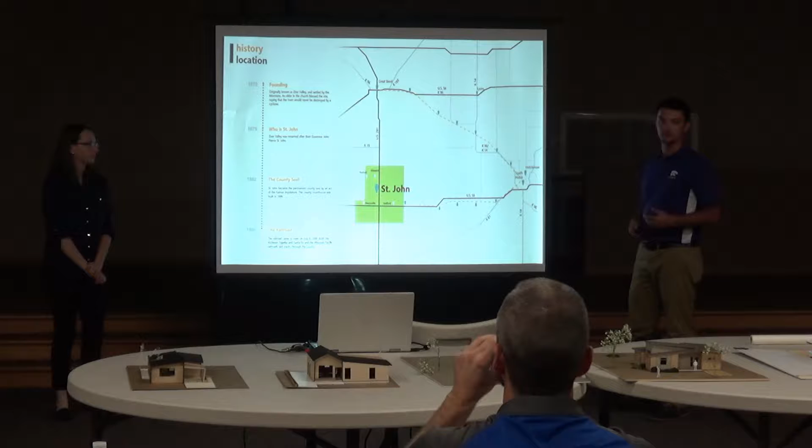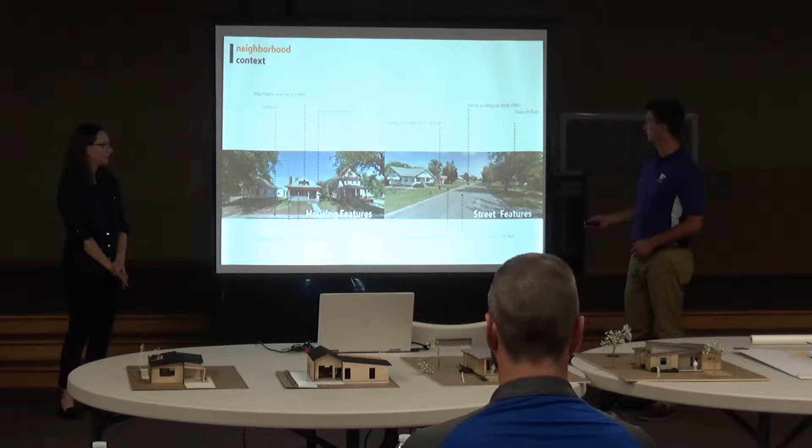This is a little bit about the history. We took some time to dive into the history of the town, understand the fabric of the city. We also drove around town understanding the different structures here, the different housing types, things like front yard setbacks, which are important in the design, the different types of construction and designs, where the sidewalks and driveways are, that kind of thing, so we could understand how to design that into our project.

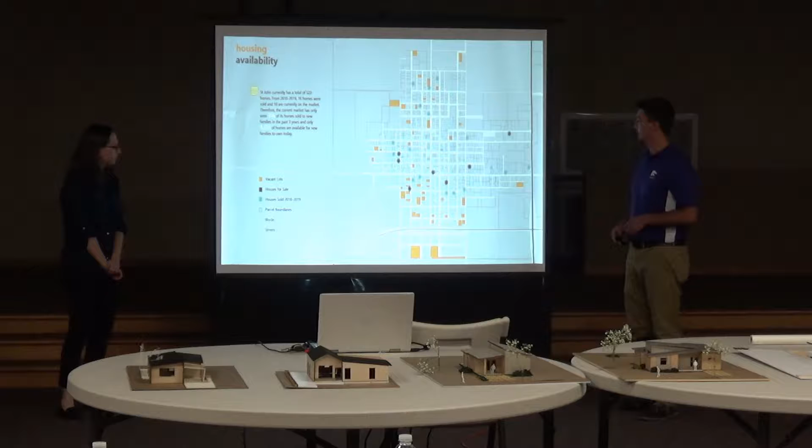We identified that there are 3 major problems in St. John related to the affordable housing problem: scarcity, the cost and energy of the existing housing, and the quality of the existing housing. So we started to map the vacant lots, houses currently for sale, houses that have been sold recently, and began to understand how it lays out on the map of St. John.

We looked at the cost per square foot differences in the houses that were for sale, and we assessed the quality using the information on the GIS system that St. John has, to understand the current condition of the housing that's available. We identified a market we are trying to design for, and started to identify how many of the homes were in a condition that are sellable or rentable, and what is not.

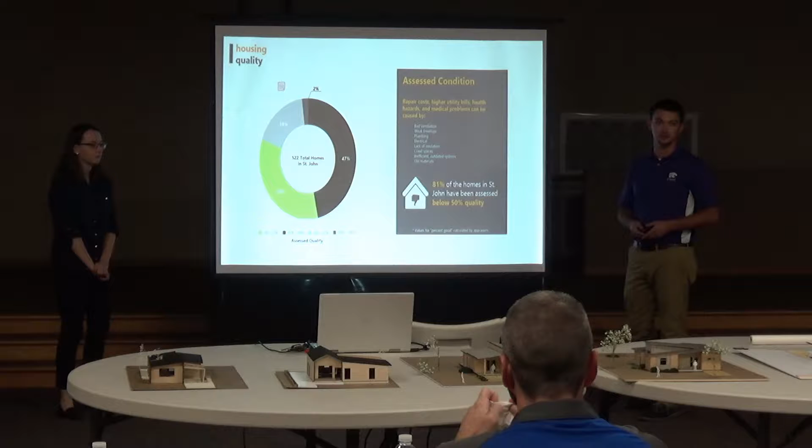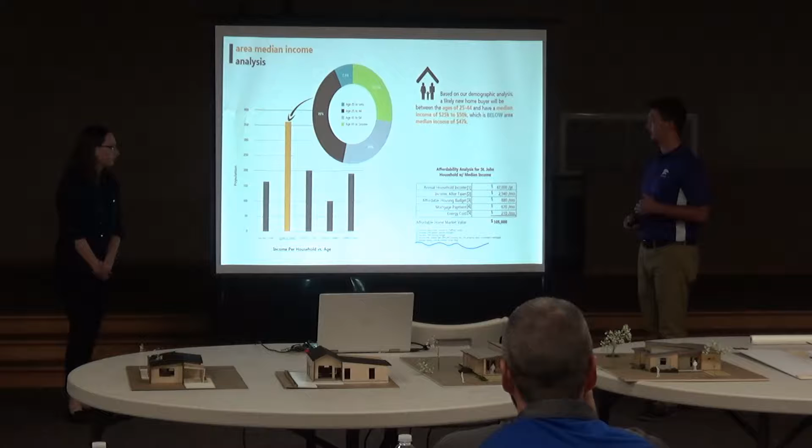We concluded that 81% of the homes in St. John are below 50% of the assessed quality. There are 51 vacant lots. Most of the houses were built between 1901 and 1930. We identified that we're really targeting an age group around 25 to 44 that make a median income of around 25 to 50,000, below the area median income of 47,000.

We took a look at some of the current housing options in St. John for a potential renter or buyer. Obviously the most expensive option would be a new build. We've got existing houses from the 1920s to the 40s, and a lot of existing houses from the 70s to the 80s.

So this is a breakdown of how we figured out how much these options would cost. For a new build, the project cost would be almost $200,000, and with that you'd also have a pretty high energy bill every year. For a 1920s existing home, the cost to buy is fairly low, $50,000, but the cost to renovate could be really high, plus an extremely high energy bill. To purchase a decent quality home would be about $100,000, with an energy bill not much different from a new build.

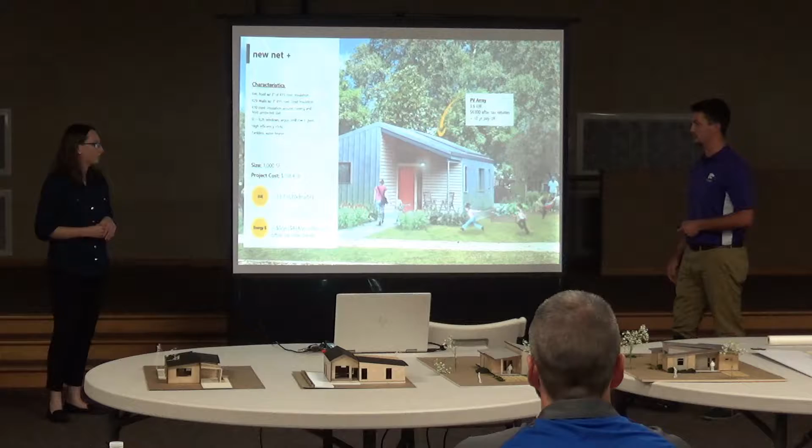So with that, we concluded there is definitely a shortage of new and affordable housing options. That's where we started thinking about how we could create a new net positive design. This was a previous project in Indian Mound, Kansas City that the studio also did, but we're going to skip ahead to our first design and talk about how we are solving this problem.

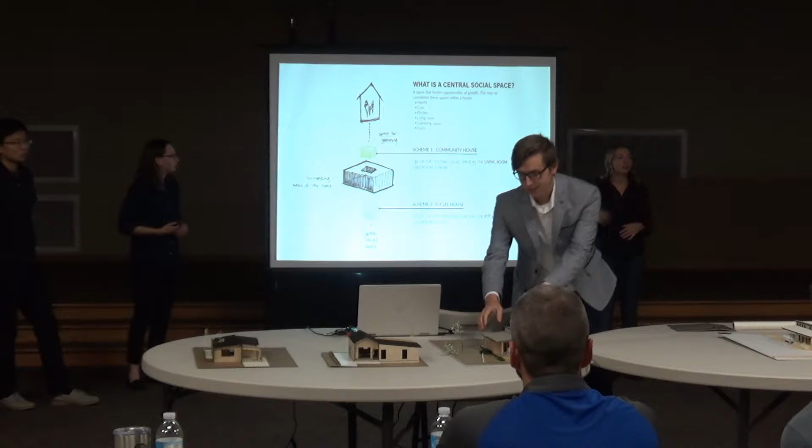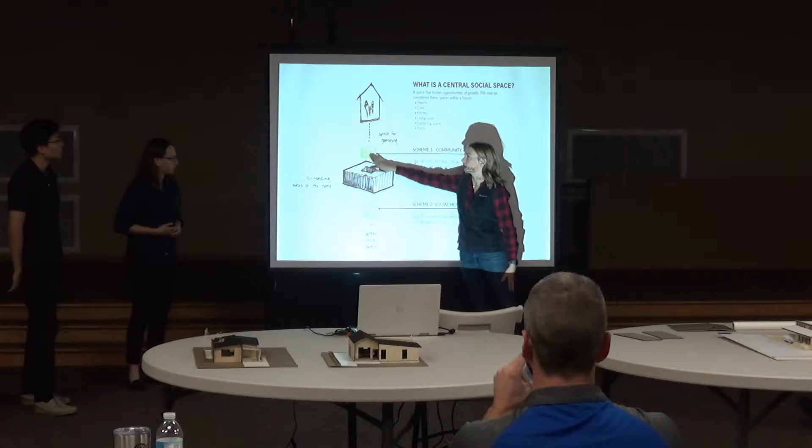So what is a central social space? This can be a living room, the kitchen, the den - it comes in very different forms and shapes. It's basically the center of the house where everyone congregates and gathers around. In these two different schemes, you can see in this diagram the central social space, where everything else in the house is surrounded - this can be bedrooms, a kitchen, it depends on the layout of the house.

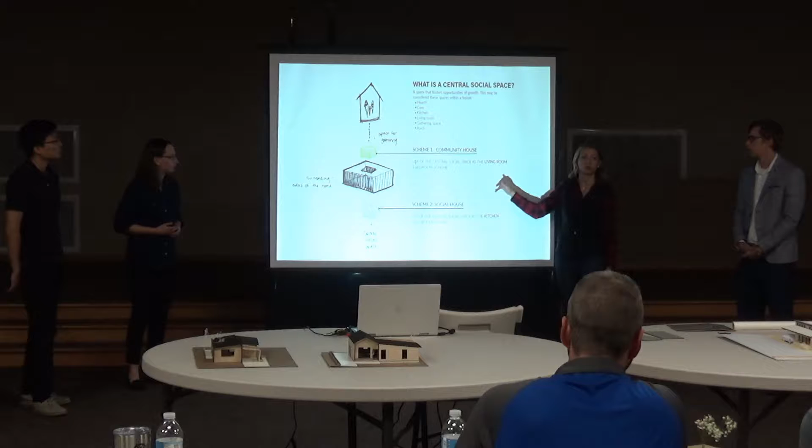Within our first scheme, we made the living room the central social space. Then in the second scheme, we changed it up and designed around the kitchen as a central social space, to see what the differences are in the environment.

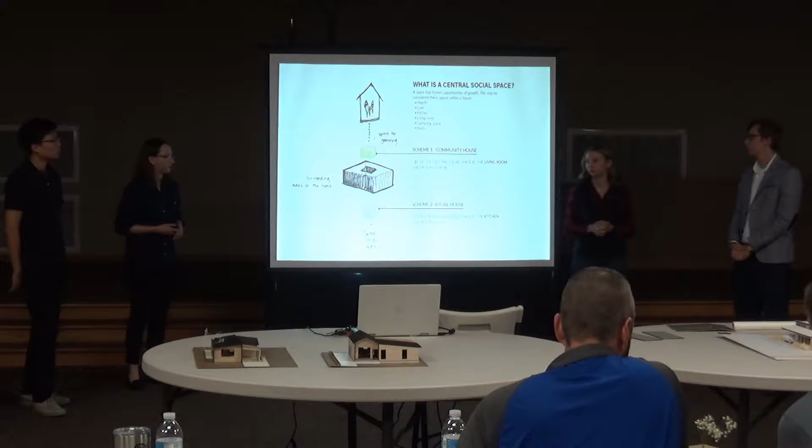Okay, this one is our 3-bedroom design. The area is about 1,000 square feet. The energy cost saving is about $424.

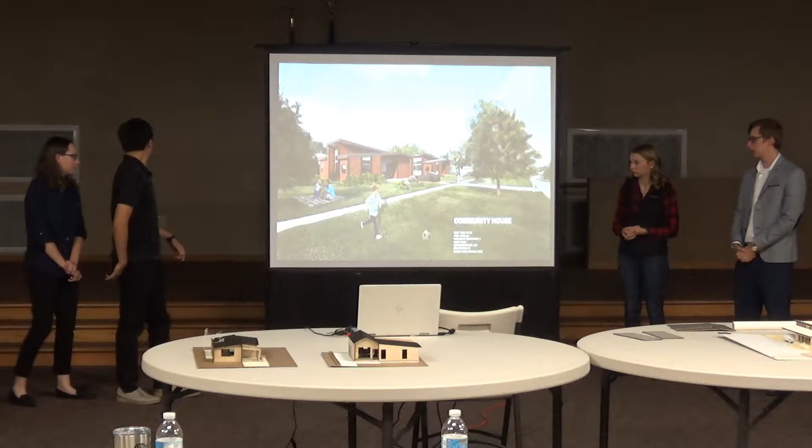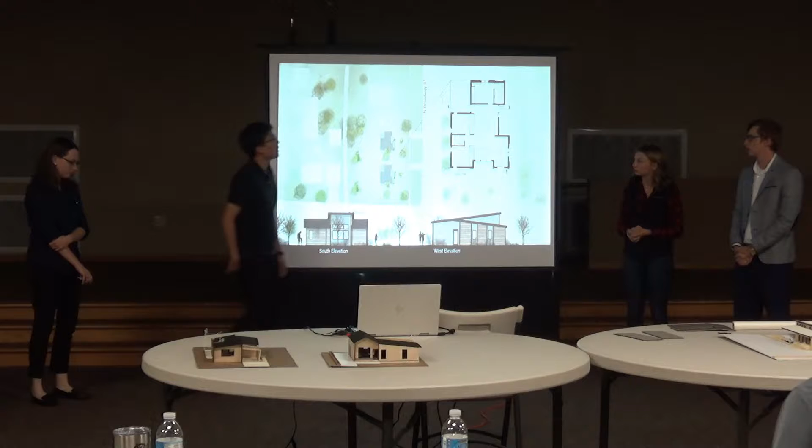This is the floor plan of this design. You can see right in the center is the central living space, and other private spaces such as bedroom, kitchen and bathrooms are arranged around the central living space.

So you can see in the center is a central living space, and these are the elevations of the building.

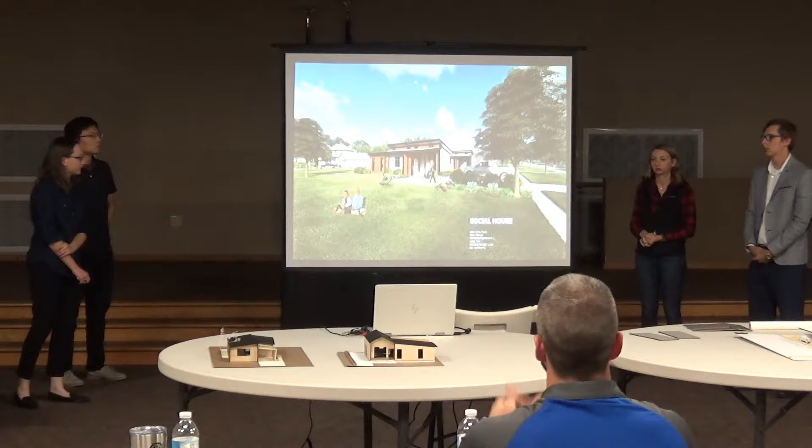This is our second design scheme. It is also centered around the idea of a central social space. The square footage is about 900 square feet.

Our cost estimate for this came out at around $116,000. And the amount of energy this home would produce is about 43 kilowatt hours.

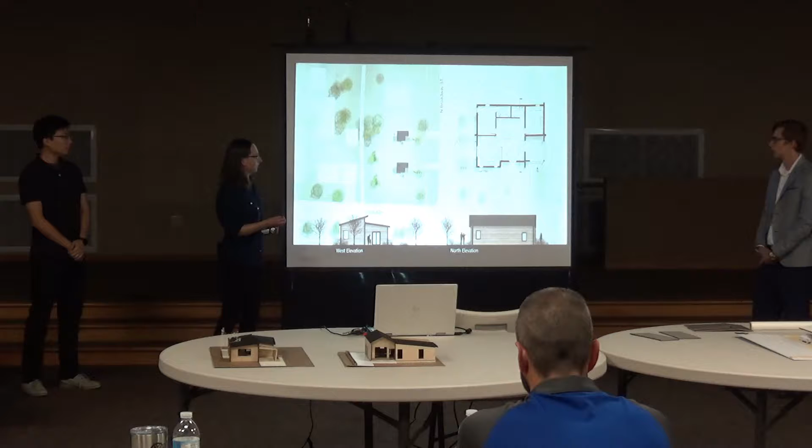As you can see in the floor plan, as we said before, our kitchen is in the very center of this house, with the dining room, the living room, bedrooms, and the bathrooms surrounding it. And then we have our front porch on the east, and the back porch on the west.

So this elevation right here would correspond with this side of the building, and then the north elevation would correspond to the top of this floor plan.

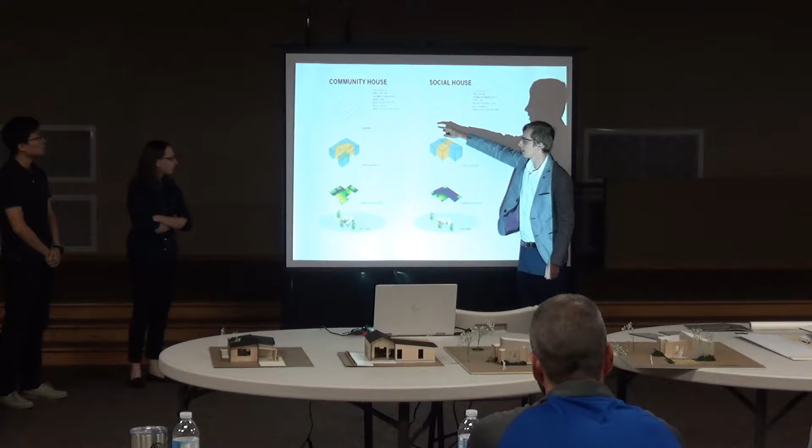These are just some diagrams comparing the two homes. The circulation is pretty similar on both homes, showing the main walking paths in the home, and the axes are pretty much the same on both of the homes.

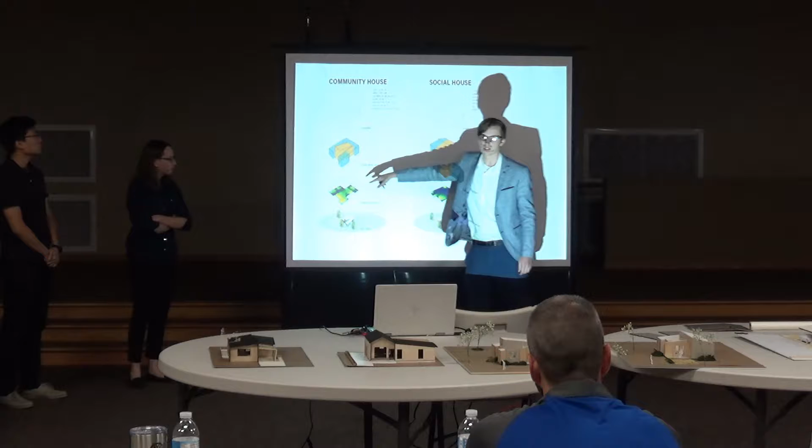And then this is just demonstrating where the main central space is, diagramming it. This is our daylighting factor, showing how much natural light you're going to get in the home and where it's coming from. And this is the site design showing where your main views are and where your sunlight's going to be coming from.

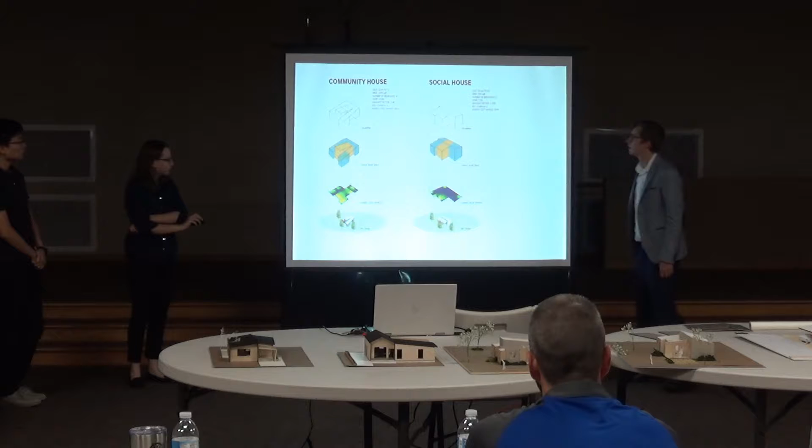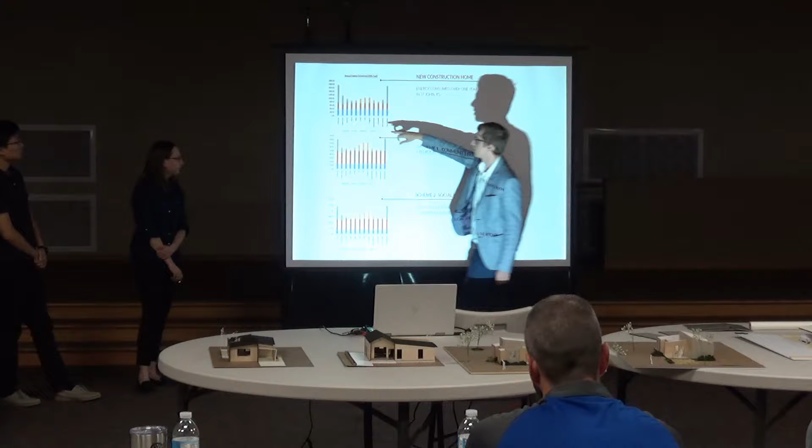These are just our energy savings. One is the new construction, and this is comparing it to ours. The new construction looks very similar, but the numbers on the side are much higher for the new construction than for ours.

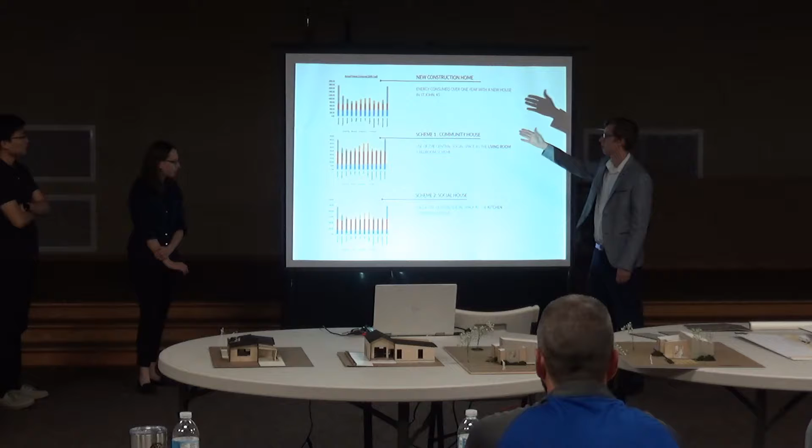And this is just showing how much you're going to save. I think it's like $1,500 per year for the new construction, and it's right at $400 net positive per year for energy costs for ours.

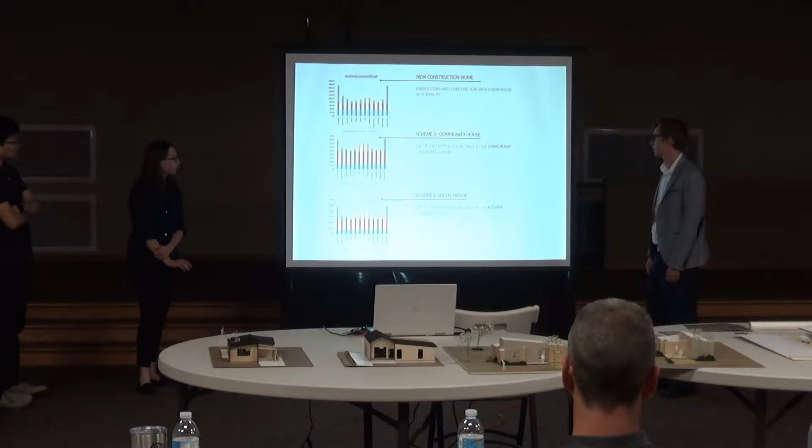And then just to conclude, the main reasoning through all this, with the central social space, why it's important, or at least why we feel it's important in our group, is that today, in terms of modern culture, a lot of families are kind of getting pulled away from each other because of technology, like kids going and playing video games in their rooms and watching TV in their bedrooms instead of eating in the dining room or the living room.

So our thought was that by creating this, we're trying to reconnect families together so that even if their kid is in the bedroom, they can still interact with them and see them and communicate with them much easier by removing the hallway that separates the spaces.

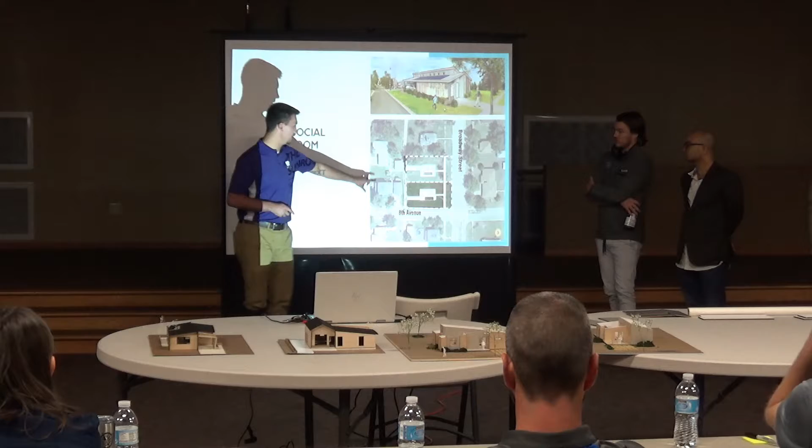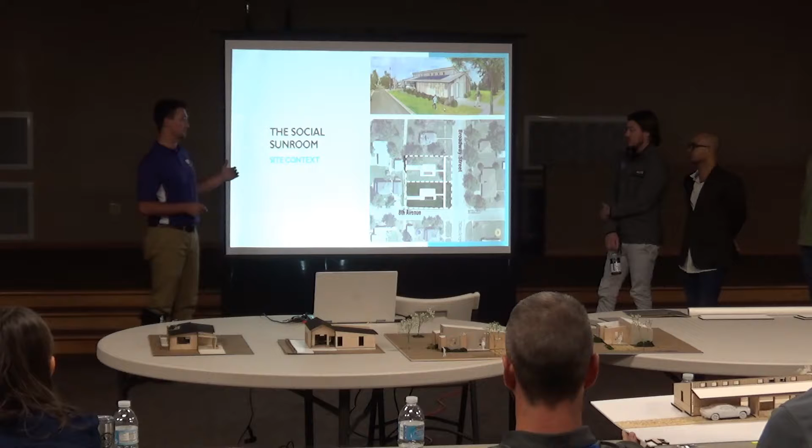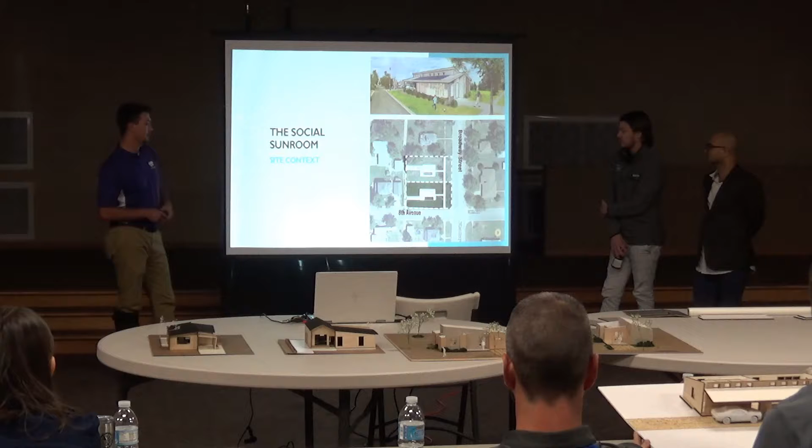Our site is the full 120 by 120 foot parcel. To maximize density, we can re-divide it as it was before it was combined into a single parcel, creating two living units on the site. This shows a potential opportunity for two designs on that street. The corner one is the site plan for the scheme we're showing first, with a front porch on Broadway Street, similar to other streets in St. John, and alley access for parking.

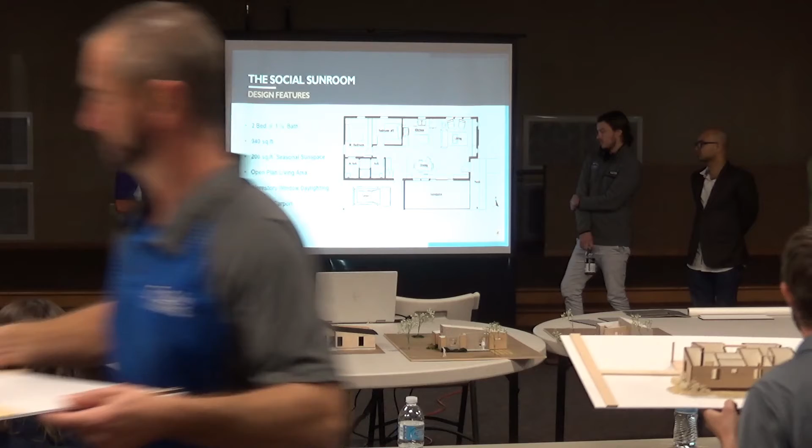The open plan living area has clerestory daylighting, which we'll show in a second. The covered carport is another feature we wanted to include, since we don't have the opportunity for an enclosed garage given the square footage requirement, but a covered carport can still be very helpful.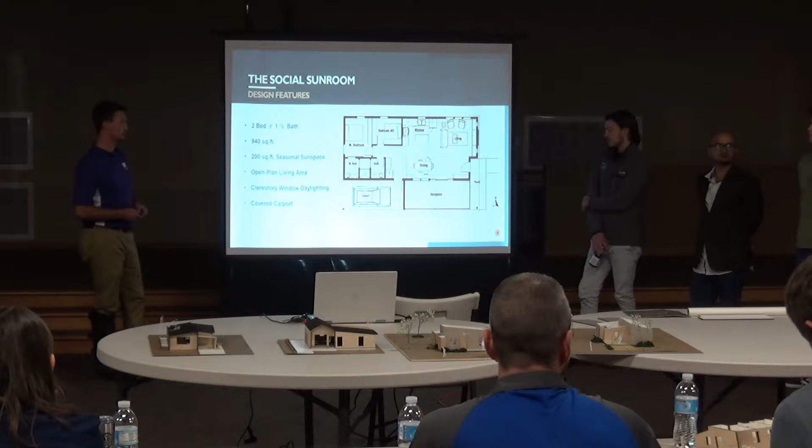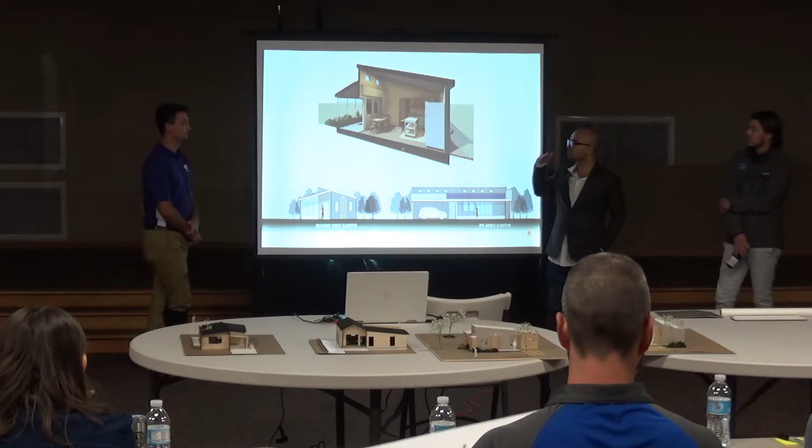This is a perspective section showing the 2-bedroom layout, looking from the living room space towards the kitchen and dining space, with the sunroom in front. This is our elevation from Broadway Street, and this one from 8th Avenue.

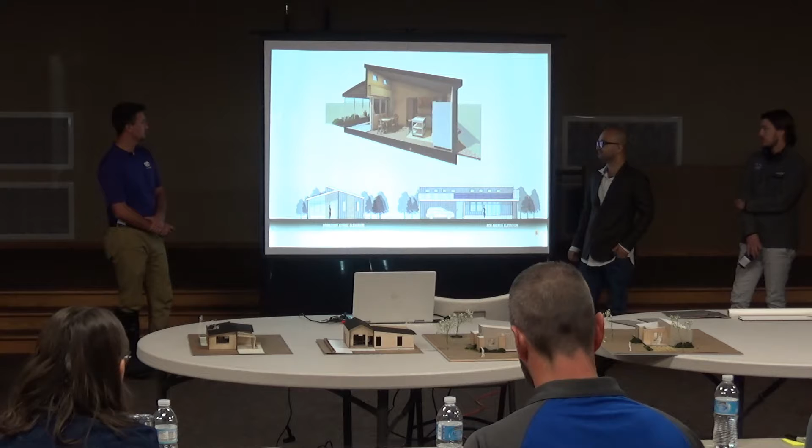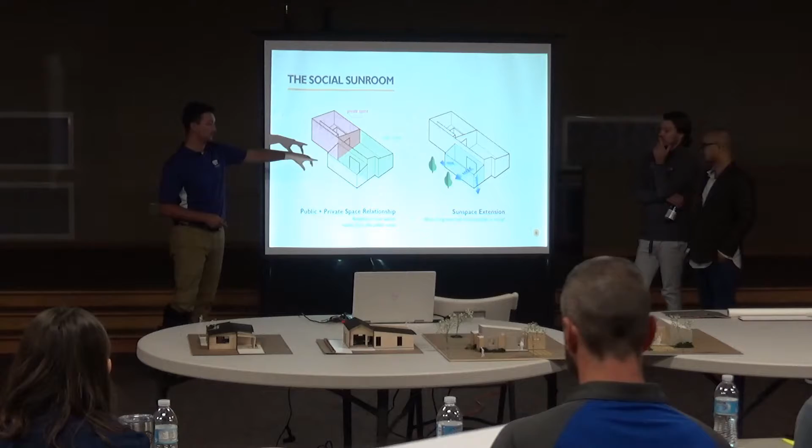For the social sunroom, at a diagrammatic level the public space and private space are separated so the private spaces stay hidden from public view. You can have guests over without them seeing into the bedrooms and bathroom area. It also opens up into the sun space, extending the living room area. In summer you can open up the sun space and it acts as a patio, extending out from the living room and offering nice views to the yard and street.

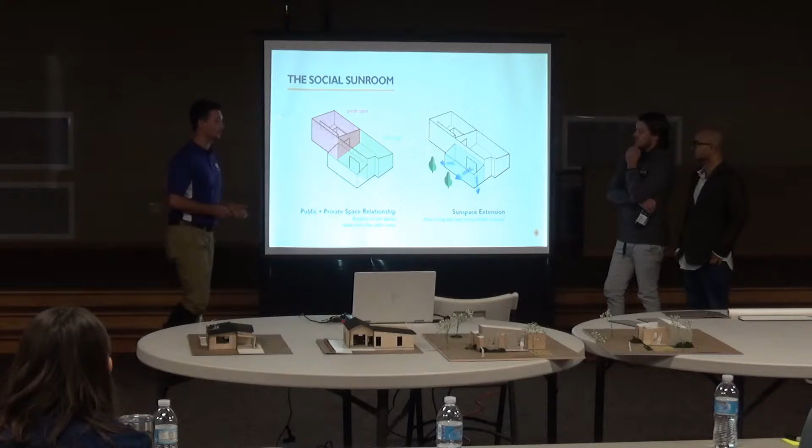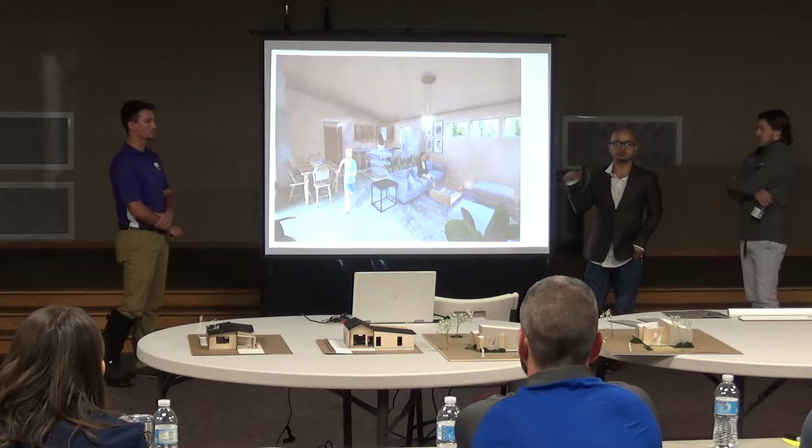This is the living room from the same space, and this is another exit on the side of the house. Here is our sunroom and our living room, and this is the front entrance, with the Broadway street visible from the front. From the front entrance looking towards the kitchen, you see the living space and the kitchen at the end, and this space leads towards our private space, which is visually far from the public space.

This is our building, and this shows how we are using our passive strategies in our building.

This is the passive system we are using during the winter. We are using the sun space to heat our building, and this is our daylight analysis. You can see our space, all the private and public areas, is quite lit throughout the day.

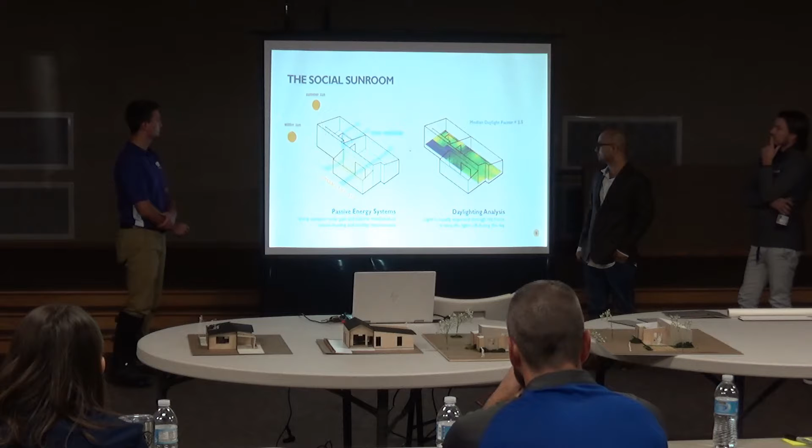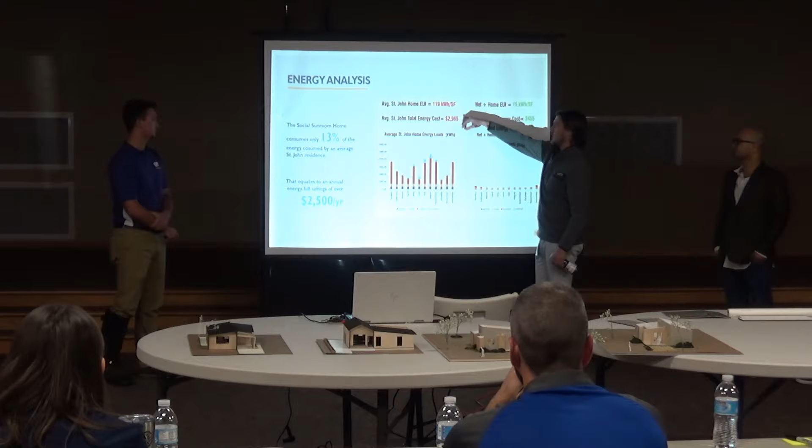If we look at the energy analysis, similar to the group before, you compare an average St. John home to this net positive design. You can see the difference between 119 and ours running 15. Looking at cost, the average cost for a St. John home is about $3,000, and our current scheme is running about $455.

So in summary, the project cost would be around $121,000 for this home, which is about $105 per square foot.

And with that, we'll transition into the second scheme, which we're calling the Living Lookout. We call it that because it offers a 3-bedroom design, so it's a little more comfortable for a larger family, with 2 bathrooms as well.

The Living Lookout offers a lot of lighting in the public area that allows you to look out into your yard and landscape, with some very tall glazing.

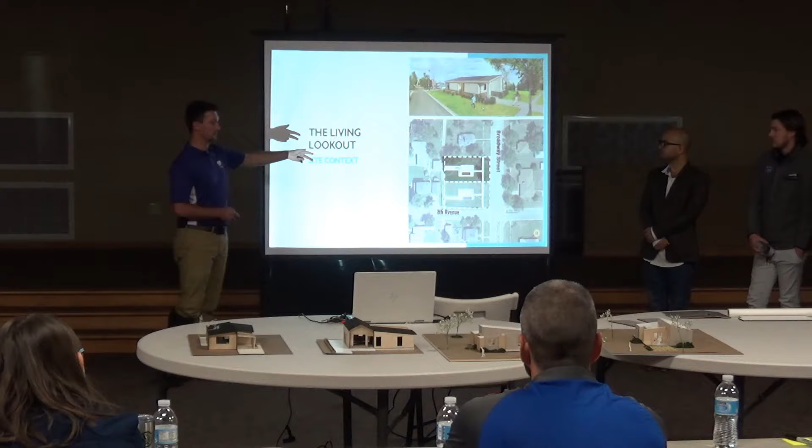So this is again how it's situated on site. This is the other alternative for where it could be situated on the other parcel. Again, it's 3-bed, 2-bath, a little larger at 1,095 square feet.

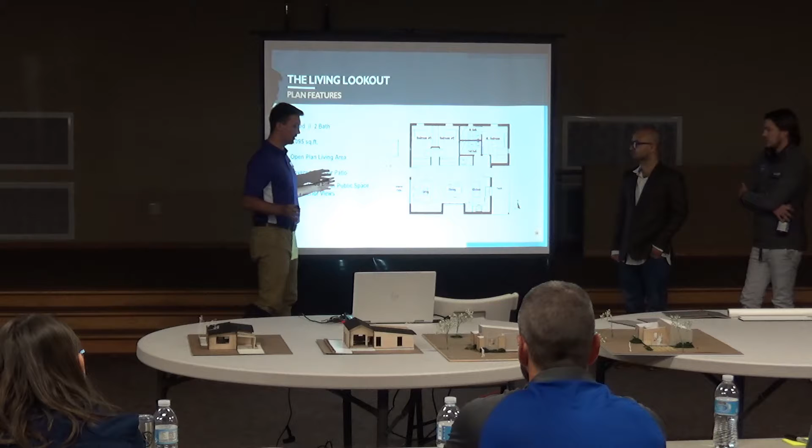Another plan for open area for the living spaces. As you can see on the bottom, you would enter from the right side on Broadway, and you'd open up into a very unobstructed area with the kitchen, dining room, and living room all in the same part of the house.

On the north side of the house, you have 3 bedrooms, including a master with an ensuite, both full bathrooms with the option to have one with a tub shower. It's got a covered exterior patio, which we're using as an extension of the living space that you can enjoy on a nice summer afternoon.

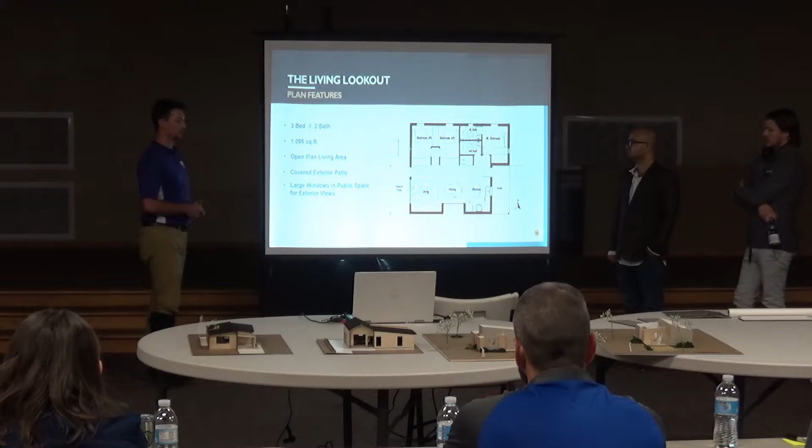And again, those large windows in the public space, which we'll show you. So this is another section perspective looking from the kitchen towards the west direction.

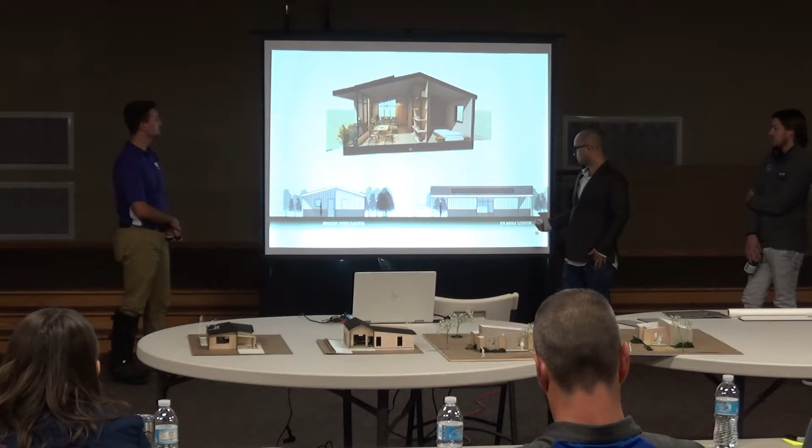At the far end you can see the living room that extends towards the backyard, and there's the dining room, and we have a bedroom, with a transition space of built-in cupboard furniture separating them. This is our elevation, from 9th Avenue, and this is from Broadway street.

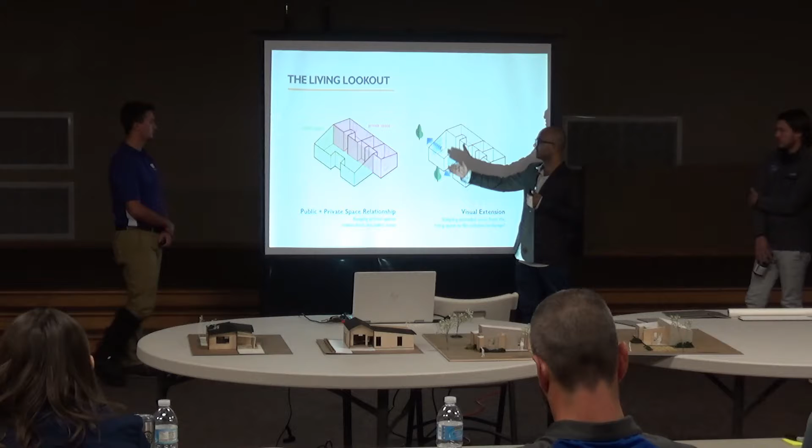The strategy in this 3-bedroom design is that we are separating public and private space through the horizontal axis. In the previous design, we had the same idea but with a vertical axis. So you see the public space towards the south and the private space towards the north.

In this one, we are punching out certain spaces in our elevation so that we could have the interior and exterior space blend, giving a visual extension towards our street.

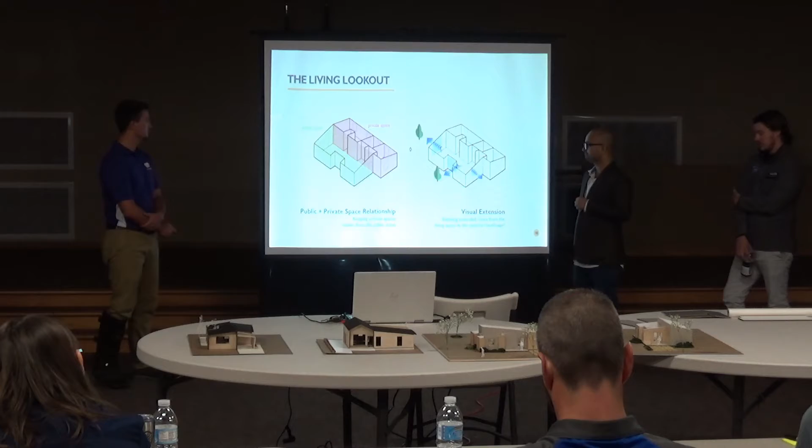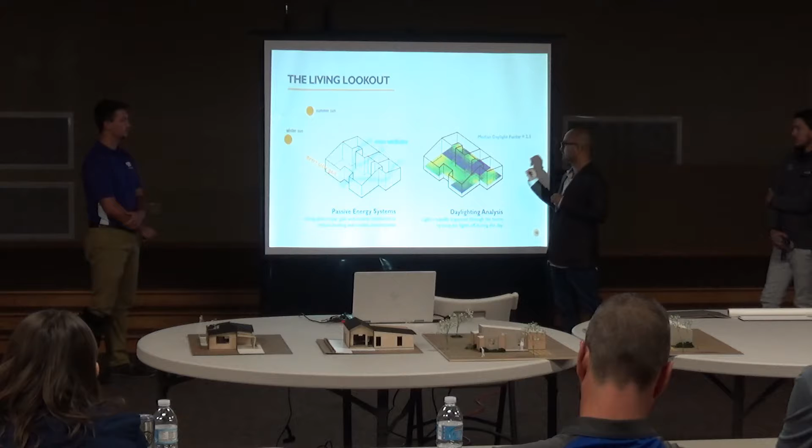For the passive strategy for this building, the first thing we are using is cross ventilation, which you can see in this diagram. That's one of the main ideas, and another is direct solar gain. In the previous design we had a sunroom; for this one we are using direct solar gain. This is a daylight analysis showing we have clear daylight in all of our living space.

So to clarify on the energy thing, when these guys are estimating like $500 a year in energy costs, they're talking about an all-electric house — that's heating, cooling, lighting, hot water heating, and plugs and stuff like that.

The concept of this as a net zero building is that when you bring down the energy use of the house to an amount that low, you can more affordably offset that with solar panels. So one thing we really want to have happen with this house is that the solar panels are part of the house from the beginning, instead of something added on later — built into the house like a built-in appliance, so whoever lives here can benefit from the energy savings from day one.

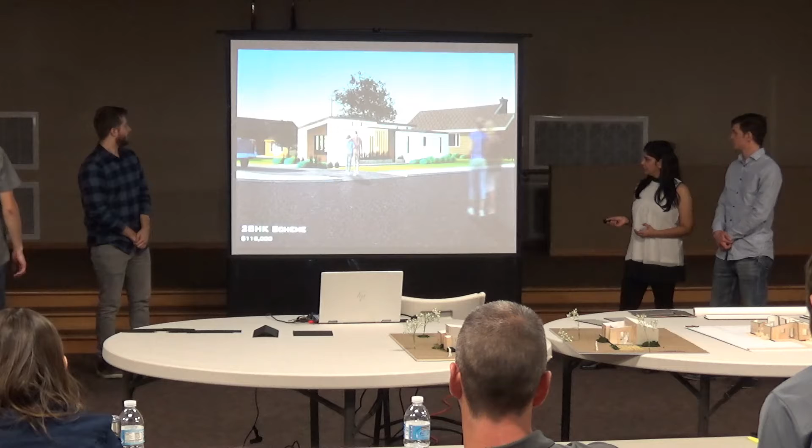So first off is the 2-bedroom scheme. It's going to have a total cost of about $118,000, and it's 984 square feet. It will have 436 square feet of patio space, as well as a paved front yard of about 480 square feet.

So you'll have the intersection of Broadway and 8th, where this house will be located.

So, a simple diagram of how we came to this concept. We took the simple idea of a gabled structure like most of the houses here, and decided on priority of space, changing that gabled structure to reflect private versus public space. We then created voids that allowed those patio spaces to really jump out in this design — you see these three lighter blue squares representing the different outdoor public spaces created through this house.

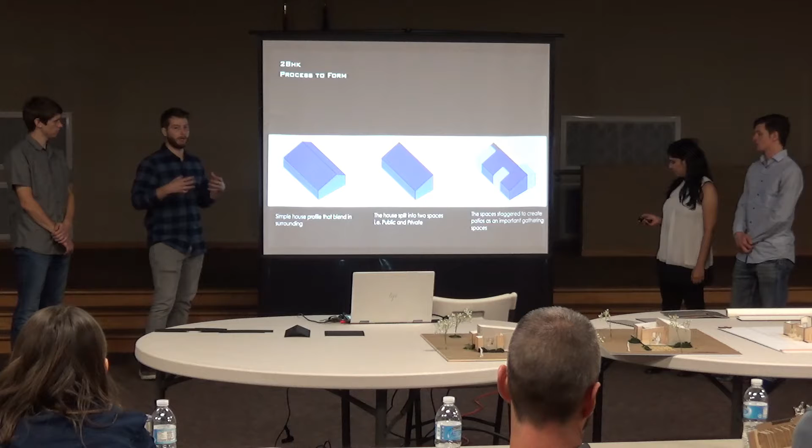So you can see more of what we're talking about. When we were talking to St. John, the three things we heard the most when it came to what spaces you really use for family and friends were: garage, living room, and backyard.

We really wanted that to be a very clear circulation when you're moving into your house — from the carport all the way down into your living room, and then a separate space created through the kitchen, allowing it to have its own identity.

You're allowed to have a living room where maybe people are watching the football game while others are cooking. They can sit down, just talk, and have a more quiet space. And then you have the very clearly outdoor space of the patio — it's all divided through this.

You also have this connection through a second patio space. It brings in plenty of light, so you get a good amount of lighting without it being directly in your eyes when sitting down. We're also suggesting some small planting, which will allow shading during the summertime, and during the winter, when the leaves fall, you'll have plenty of direct light coming in, warming the space when you need it most.

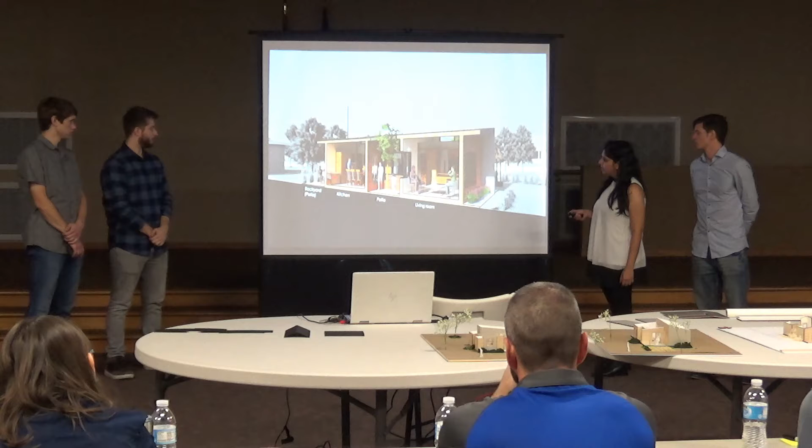In this section, you can see the connection of the public spaces — the living room, the central patio, kitchen, and the backyard patio. Through the openings, even though in plan it looks like a division, all of these are visually connected to each other.

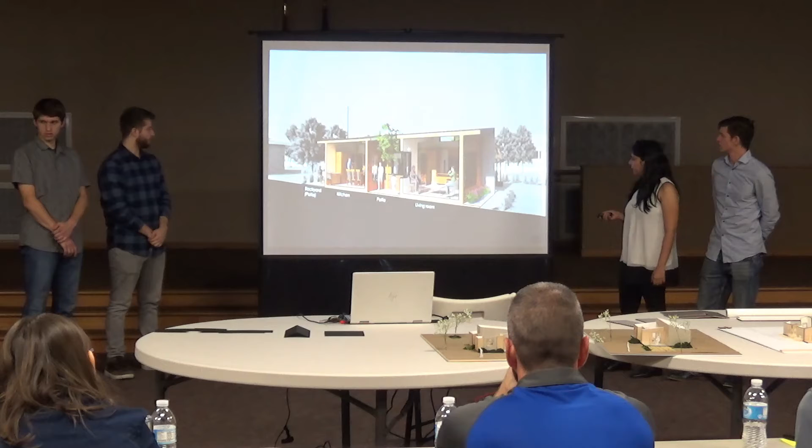This is a view from the living room, looking into the entrance vestibule, the patio, and the kitchen and dining area at the back.

So the passive strategies that we used for this scheme were cross ventilation and solar heat gain, wherein you store the heat into the floor mass during the winter times.

These graphs show the energy modeling where a typical 1980s house would use 48.3 kBtu per square foot, which would cost about $1,500 approximately, but the proposed net positive scheme would just cost $411 annually.

And a good thing to mention now, thanks Professor Gibson, we were able to start talking to a salesman in Hutchinson about solar paneling, a solar installer.

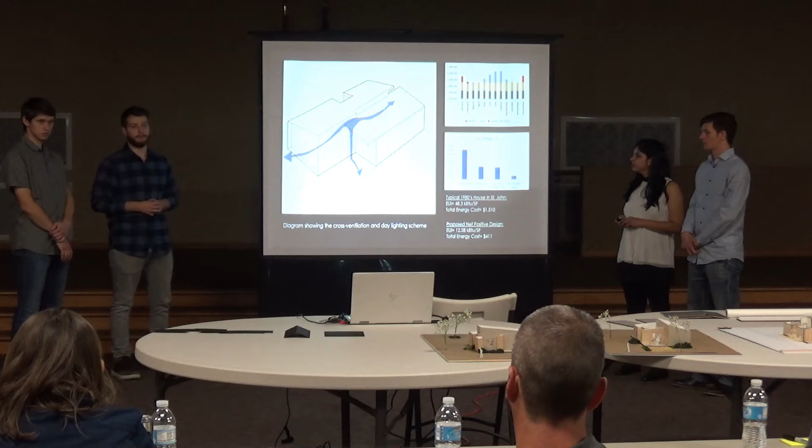These are our schemes for the daylight modeling, where you can see all the spaces are naturally lit.

And this is the structure, the preliminary structural grid, where our main structural walls would run east-west.

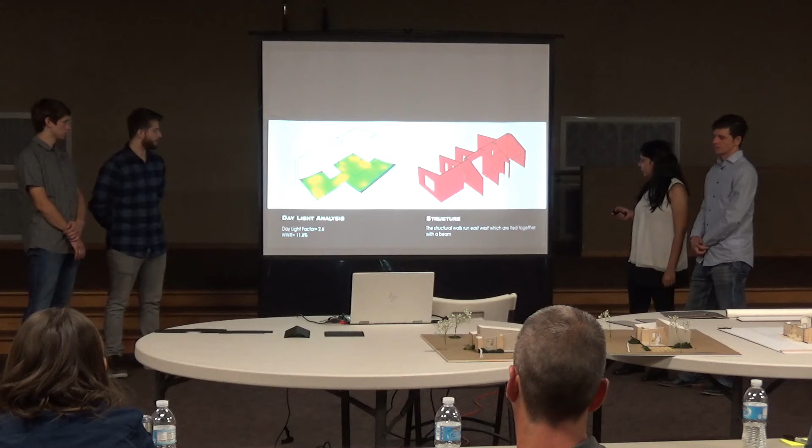This is the 3-bedroom scheme. It has some similarity with the first scheme that you've seen. For us, it was important to have the gathering space in the exterior, and try to make it a gathering space that's also a bit more private, instead of just putting it in the front, take it in the back. And this cost estimate for this one is...

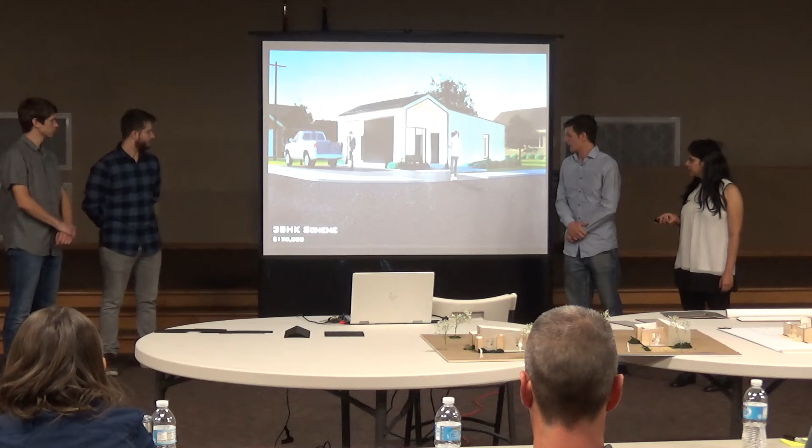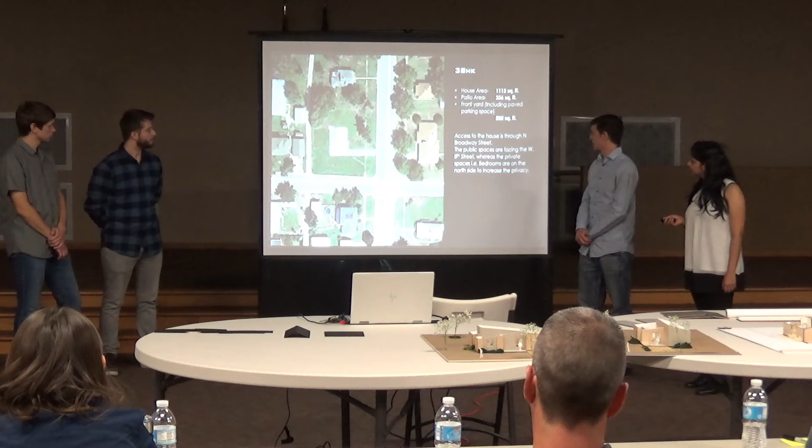$130,000. And this house is a little bigger than the other one. It's 1,113 square feet, and the patio area is smaller than the other one, it's 336 square feet, in the front yard. And you enter through Broadway as well with the car.

So in these schemes, we thought it was important to divide the spaces we're going to be inside, like different groups of area, the private space for the 3 bedrooms and the bathrooms, and then we prioritized the public space. That's one of the biggest, and to save some money and be more efficient, we also tried to connect all the wet areas with kitchen and bathroom to keep it in the same place as close as possible. And then with this L shape, you create this space in the back that's more covered from the street traffic.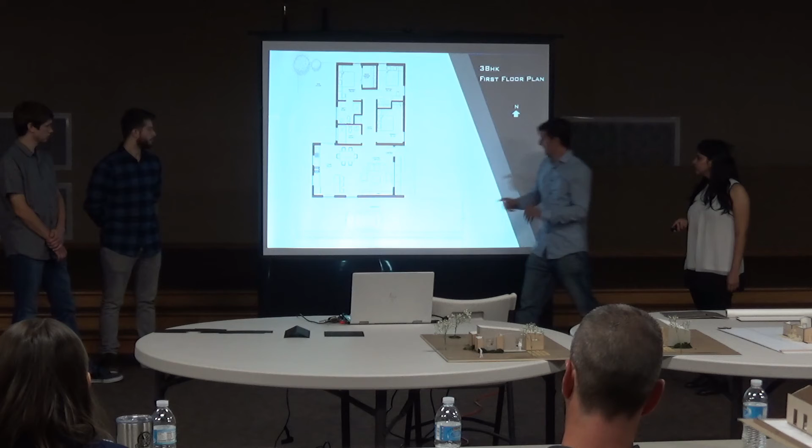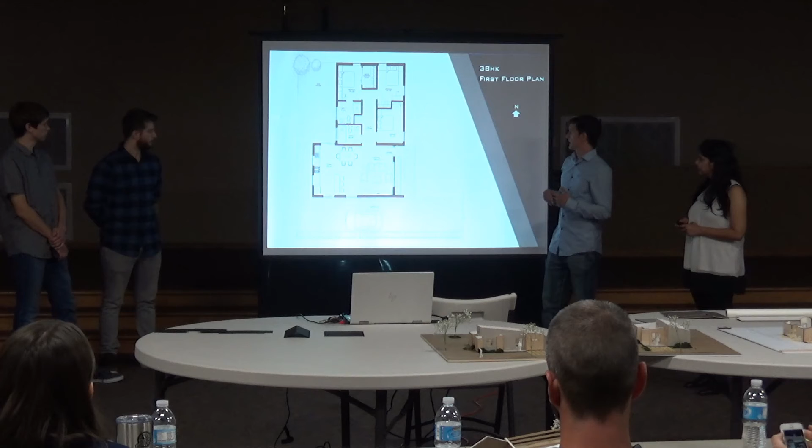So this is the plan. You will enter through Broadway, go into the entrance, and then you will have the open space that is the kitchen and the living room together, to have more of a big space instead of dividing it. And here you can see more of the idea of dividing what is public from the private. You have the 3 bedrooms, and one of them, the master bedroom, will have its own bathroom and a bigger closet than the other ones.

As you can see, this is a render symbolizing this section, going inside the main space, the public space of the kitchen and the living room.

This really shows the volume that both the schemes have. The public spaces, which are the living room and the kitchen, will have higher volume, and the bedrooms would have lower volume as compared to that.

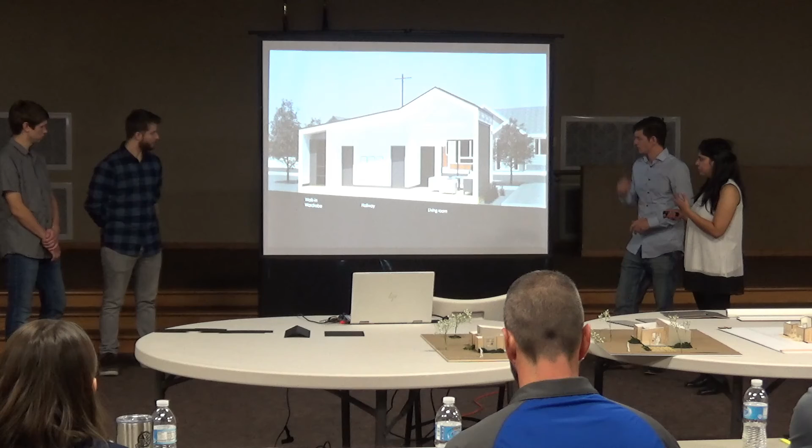And this one shows when you enter to the house, the living room and the kitchen, the open space.

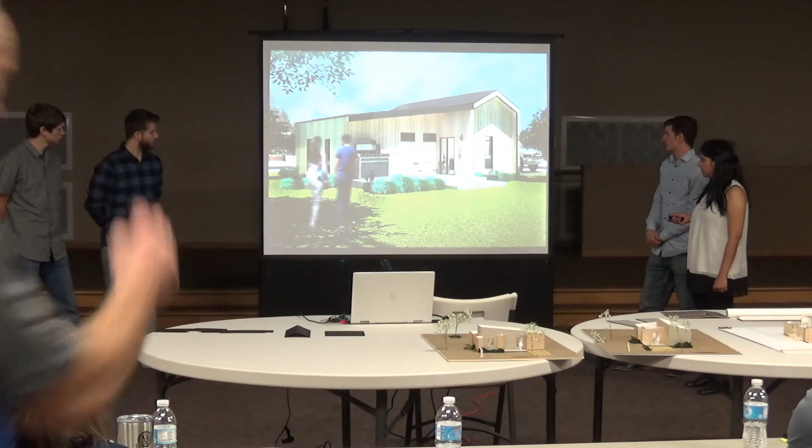This is a view of the backyard patio, which is one of the patio spaces.

Again, in this scheme, we have used cross ventilation and thermal gain during the winters as our passive strategies, where the total energy cost per year comes down to $413 per year.

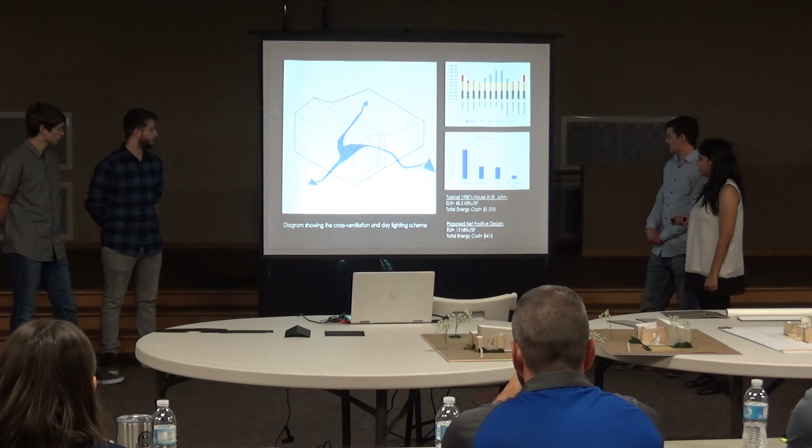This is our daylight analysis scheme where most of the habitable spaces are daylit.

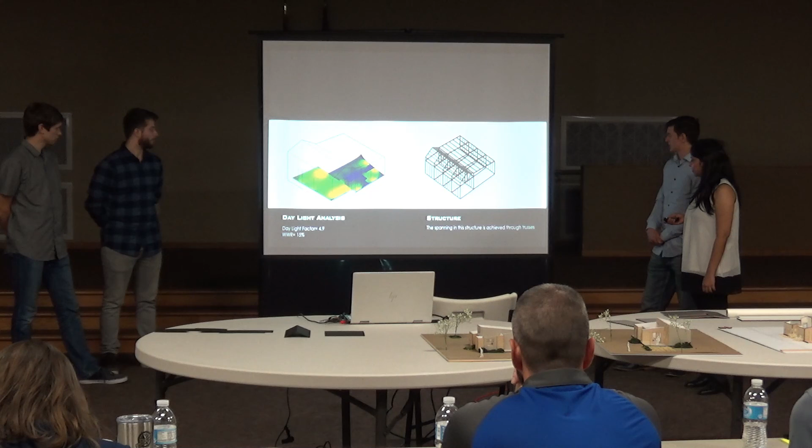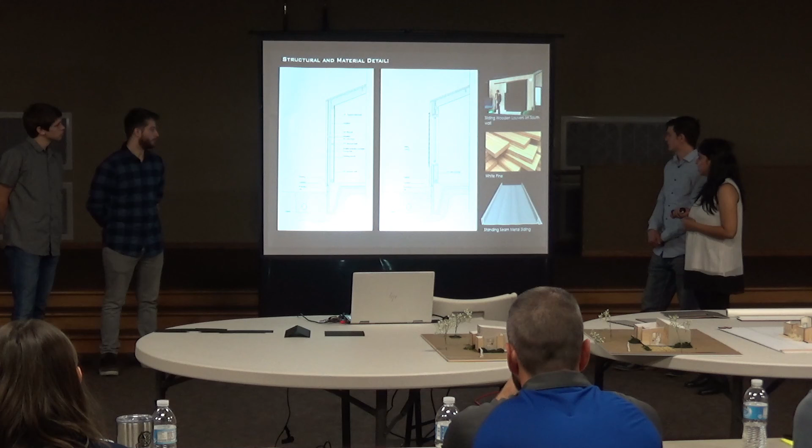Also, we went ahead and thought about what kind of materials we could use. Since patios are one of the driving features of our design, we thought of having white pine in them, and the rest of the house could have standing seam metal siding.